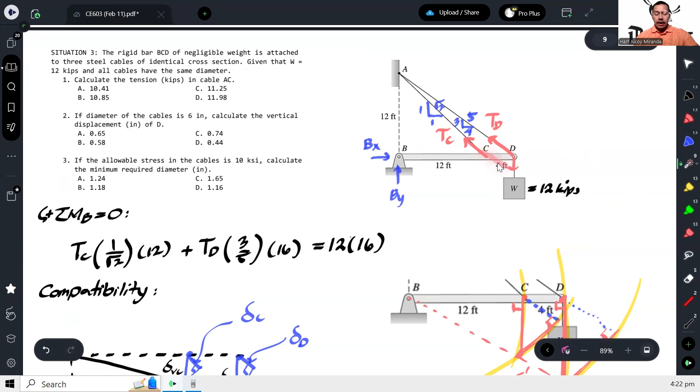So, tawagin natin ito na vertical displacement sa C. Ito naman ay vertical displacement sa D. Okay, kasi pwede natin ma-relate yun no? Yung vertical displacements nila. Para sa vertical displacement sa C, alam natin na si AC, ang slope niya is 1:1. So, syempre, kapag in-extend mo yung line na to, ang magiging slope nun 1:1 pa rin. So, ibig sabihin, ito 1.

Ito na lang. So, di ba, ito ay 1:1. So, lumalabas, 1:1 din to. Or to be more specific, dahil right triangle naman to, kung ito ay 1, 1 din to. Kasi ito ay square root of 2. So, kapag kinuha natin yung ratio ng displacement sa C sa vertical displacement sa C ay equal lang siya sa 1 is to square root of 2. So, therefore, yung vertical deformation sa C ay equal, cross multiply lang, sa square root of 2 deformation sa C.

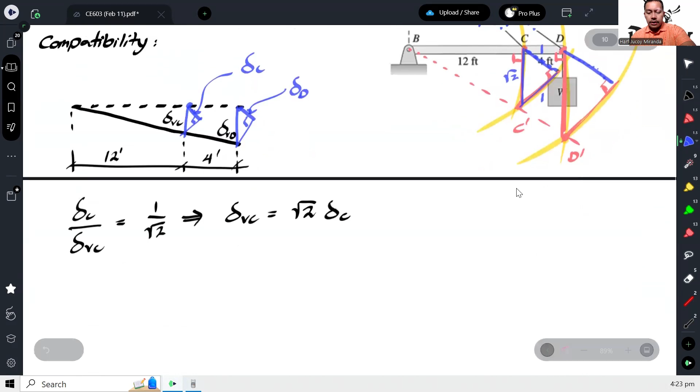Okay? And let's do the same thing para sa vertical displacement sa D. So, alam natin na yung slope na to kanina ay 3 vertical, 4 horizontal. So, ngayon, lumalabas ngayon na ganito. Ito medyo tricky ng kaunti. Let me just redraw that part. Di ba ito yun?

Okay, so alam natin na ito ay 3 vertical, 4 horizontal, 5. Pag nag-drawing ka ng horizontal line dito, itong angle na to will be equal to this angle. Kung equal yon, tapos alam natin na ito ay 90, so ito ay magiging complement niya. Ngayon, kung tinignan mo itong right triangle na to, itong angle na to is complement ng complement. So ito rin yun.

Kung ito yung angle natin, ang opposite natin is 3. Ang adjacent natin is yung 4. So kung ito yung angle, yung opposite na to, ito yung 3. Tapos ito naman yung 4. So ito 5. Okay? Or kung nalilito kayo doon, pwede nyo i-solve yung mismong angle. Wala namang problema doon. But anyway, I'll just use this.

So therefore, yung deformation sa D divided by deformation vertical sa D, ni-ratio ko to, ay equal lang sa 3 is to 5. So therefore, yung deformation vertical sa D will be equal to 5 over 3 deformation sa D. Okay? And now we can proceed with ratio and proportion.

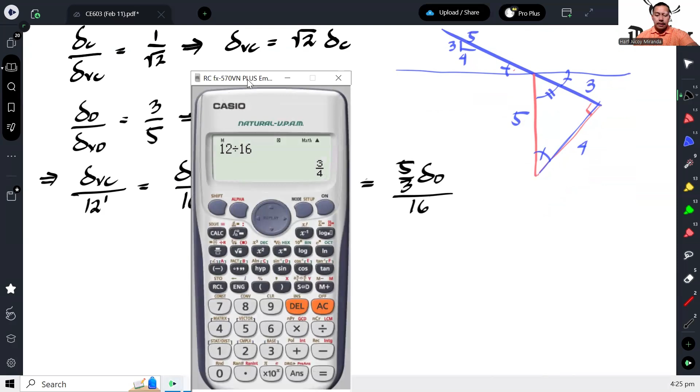So, square root of 2 times 16 times 3 over 5 over 12. So, magiging 4 square root of 2 over 5. So, therefore, 4 square root of 2 over 5 deformation of C ay equal sa deformation of D. And from here, we can incorporate, ano ba ang formula ng deformation? Di ba? PL over AE.

So, 4 square root of 2 over 5. Ang P natin is yung tension sa C. Yung L natin ay yung length ng cable na to. So, para makuha natin yung length ng AC, that is just the square root of 12 squared plus 12 squared, which will give you 12 square root of 2. Yung length naman ng AD, that is the square root of 12 squared plus 16 squared. That is gonna give you 20.

So yung AC natin is 12 square root of 2. Kaya lang feet ito ha. So mag-multiply pa tayo ng 12 inches para maging inch over area. Okay, same diameter naman daw.

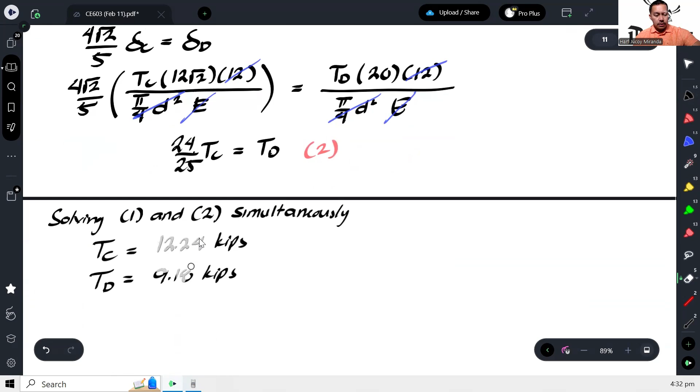4 square root of 2. So, na-cancel to. Cancel 12, cancel yung E. So, nag-multiply lang naman tayo dito ng 12 square root of 2. And then, nag-divide ng 20. Ayun. So, I think may mali dun kanina. Hindi dapat ito 3/4, no? 24 over 25 dapat. So, it should be 24 over 25. Okay? Tapos, dito, magbabago rin yung values. So, tama naman, nagkamali lang tayo ng input sa calculator.

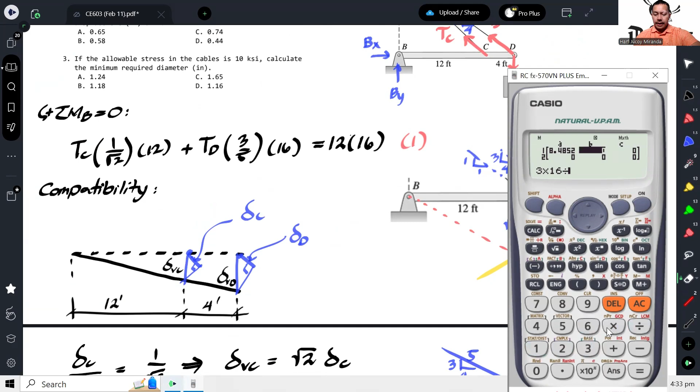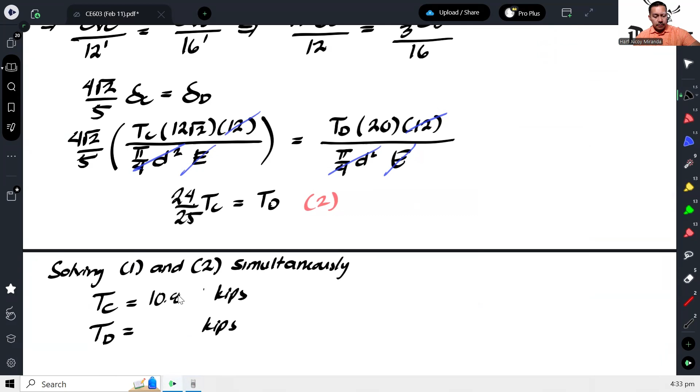So, mode, equation. So, balik lang natin. Equation 1 is 12 over square root of 2. 3 times 16 over 5. And then 12 times 16. So, dito, 24 over 25. Tapos, -1. Ayan. So, 10.85, tsaka 10.41. Yes, I think ito na yung sagot.

So, dun sa number 1, 10.85. So, that's the answer, no? Tama ba? 10.85. Tension sa C. AC, okay. 10.85. Alright, so that's our answer sa unang question.

Next, number 2. If the diameter of the cables is 6 inch, calculate the vertical displacement of D. So ito kailangan natin i-continue yung solution. So meron nang binigay na diameter, no? Kaya lang walang E, no? Walang E. So dapat may E ito kasi English unit siya eh. So we are not expected to memorize yung E ng steel sa PSI or KSI. Pero lagyan na lang siguro natin ng value para lang ma-solve natin, para lang magkaroon tayo ng basis. Sabihin na lang natin na 80 or 83.

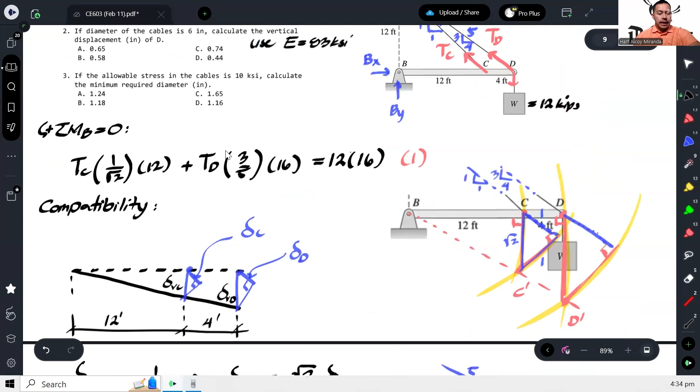So use E ng steel to be 83 KSI. Kunwari given ito, no? Kunwari given yan, ha? So, anyway, using E equals 83 KSI, para ma-solve natin yung vertical displacement sa D, di ba? Ito yun eh. Okay, at para ma-solve yan, kailangan mo lang muna yung deformation sa D. Okay? Now, note that, doon sa pag-compute natin ng tension nilang dalawa, dahil parehas yung material tsaka diameter nila, hindi naging dependent yung sagot natin sa tension dun sa area at saka sa modulus of elasticity.

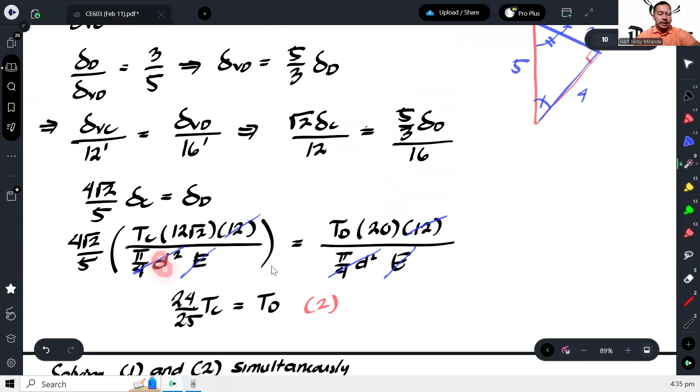So, ibig sabihin, kahit na binigyan tayo ng 6-inch na diameter, ito pa rin yung magiging tension natin sa C tsaka sa D. Okay, nakuha ba yun? Kasi hindi na magbabago. Kumbaga, kahit ilagay mo yan dito na 6, pati dito, magka-cancel pa rin. So, we will end up with the same equations. Hence, we will end up with the same answers for the tension. Okay. So, ngayon na meron na tayong tension sa D, makukompute natin deformation sa D. Tapos, after nun, we can compute for the vertical displacement using this formula.

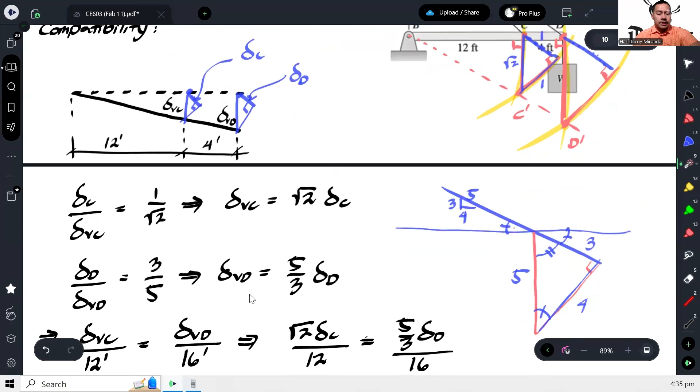Okay. So, therefore, for number 2, the vertical displacement is equal to, according to this derivation earlier, 5/3 ng deformation sa D. Pero ano ba ang deformation sa D? Di ba? PL/AE. So yung P natin sa D is 10.41 kips. So multiply na lang natin ng 1,000. Hindi, okay lang. Kips naman yan eh. KSI naman yung E natin.

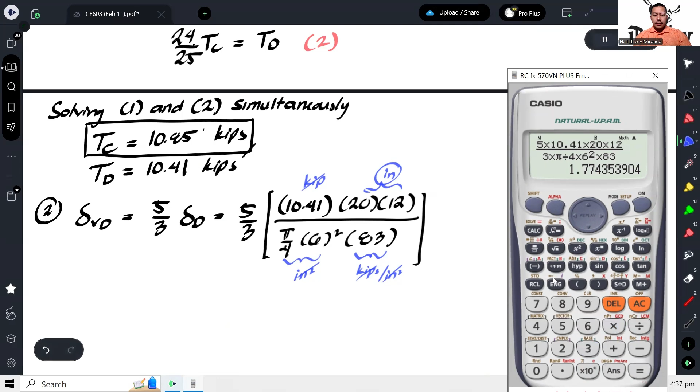Okay, so our answer here would be 5 times 10.41 times 20 times 12 over 3 times pi/4 times 6 squared times 83. So that should give us 1.77. Vertical displacement na to. Okay, so it should be 1.7.

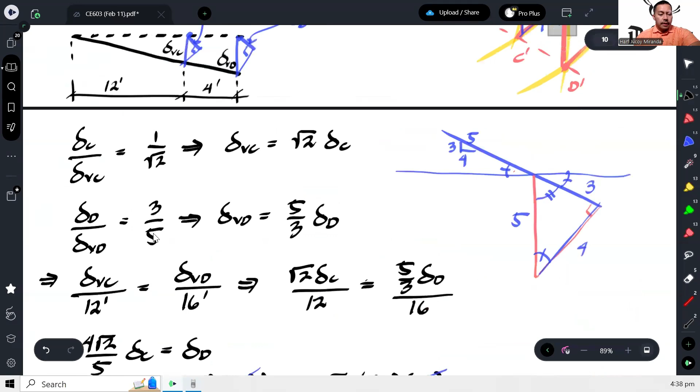Next, number 3. If the allowable stress in the cables is 10 KSI, calculate the minimum required diameter.

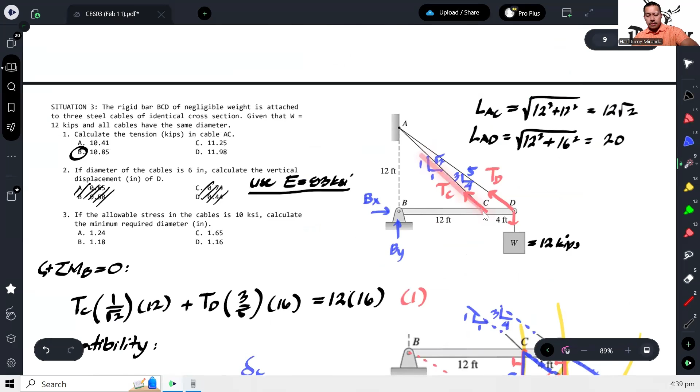So that would be 10.85 over pi over 4 times diameter squared should not exceed 10 KSI. So okay lang yan, kips naman to, tapos ito naka-inch squared, so ito rin, kips per square inch. So therefore, the required diameter should be at least 10.85 over pi over 4 times 10. Cross multiply, tapos divide ng 10, tapos square root. So lalabas dito is 1.175.

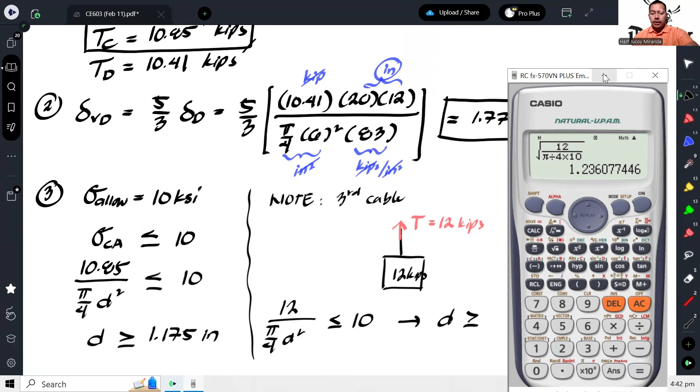So, ibig sabihin sa number 3, note the third cable is ito siya. Okay, itong cable na to is carrying a tension equal to 12 kips. So therefore, mas malaki pala yung tension na dinadala nitong cable na naka-attach dun sa weight. Kaya ibig sabihin, the correct solution should be 12 divided by pi over 4 diameter squared should not exceed 10 KSI. And dito, may makukuha tayo na diameter na mas malaki pa, and that is 1.236 inch. Okay, and this should be the answer.

Nasa choices ba yan? Tingnan natin. Okay, ayun, letter A, 1.24. Okay, so itong problem na to, yung pangatlong question is actually a trick question. And that is a reminder for you that sometimes you need to be careful with what you are answering, no? Basahin maigi yung problem statement.

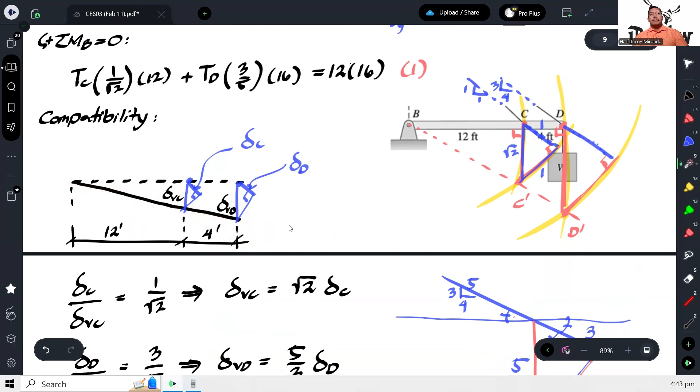Alright, so that's how we solve this particular problem.